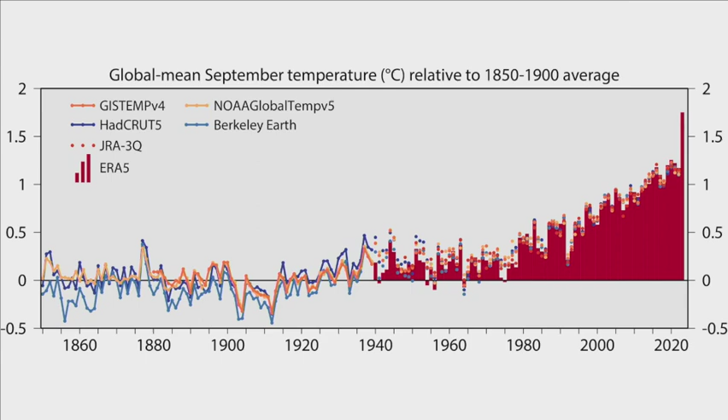That's pretty screwed, and we have to sort something out around this. So it's something that we have to do. We have to invest. Our industry, you've seen it before in various slides, is a pretty big carbon user. But I don't misunderstand the fact that there's no point just saving carbon, right? We've got to save other stuff as well. We've got our social outcomes, our strategic outcomes we need to meet, but at the same time we've got to save some money.

So we need a decarbonised, cheap, sports, leisure, community hub for the future. So here it is. The beauty is it'll be 80 degrees outside. We won't need a roof. We won't need air conditioning. We won't need any of Neil's stuff in there because we'll be achieving the same social outcomes, the same strategic outcomes. Why don't we have outcome-based commissioning? That will just sort a lot of this stuff out.

The other thing, it was interesting to see Nick and Liz play off each other around budgets this morning. Nick, 250 million. Liz, within local government, spend about 900 million, about £1 billion. We at S&P do about 200 million a year. But it's not really a competition, because there's one winner in the room, and that's the NHS obesity budget, which is 6.5 billion per annum.

6.5 billion per annum. I was sat kind of there-ish about 3 weeks ago at the NHS Estates Conference. And do you know, over 2 days, how many times they mentioned our sector? Zero. Never. Not once did we come into the NHS mindset around achieving the social outcomes that the guys have been talking about.

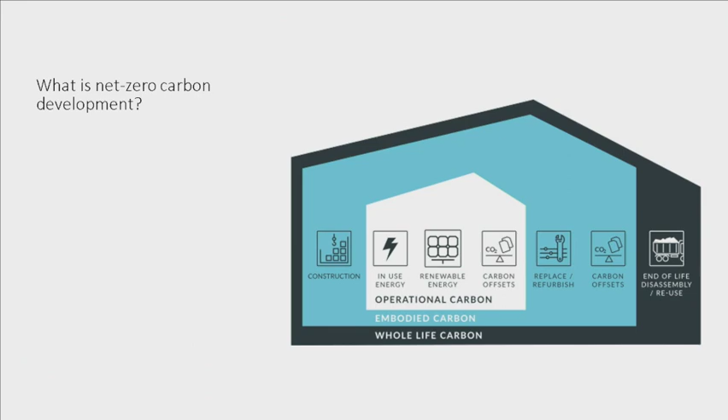To explain what carbon is, there are three sorts of carbon. The middle one is operational carbon, that's kind of obvious, it's in the in-use energy, renewable energy, carbon offset - we should take that off, by the way, but carbon offsetting. So that's operational. Then there's embodied carbon, that's when we build something in the first place, or repair something, or buy some new piece of kit. And then there's whole life carbon, which is effectively what happens when you get rid of it, when you demolish it, when you renew it, when you do something new. So you have to measure all of these, and you can measure all of them. There are ways - if we're designing a building for you, we can tell you to the gram how much carbon we're putting into that building and how much it should use.

Obviously, the embodied carbon in the construction over the period of 60 years kind of stays the same. Embodied carbon in use goes up because you repair a pump or whatever, you renew something, then there's operational carbon. So that's the whole of the carbon cycle.

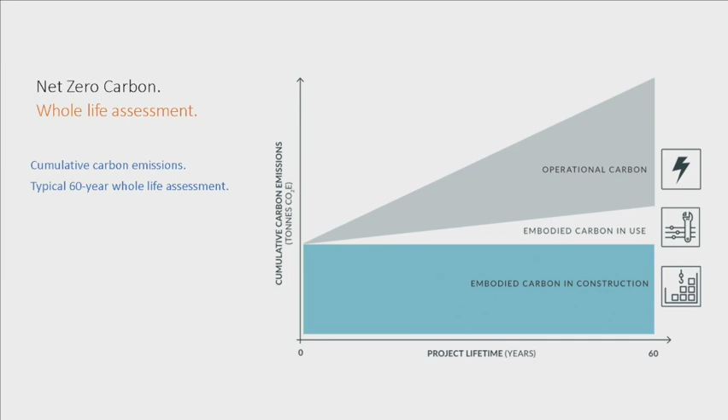And actually, I'm going to skip that because time's a bit tight.

There is an easy way to get rid of carbon. A really easy way, the simplest way, and you would never do this, right? But if you replaced a gas boiler with an electric boiler, you've done it, you're sorted. And then you buy your electricity from a decarbonised grid, you're carbon-free. But it will cost you a lot of cash to do that. Not the capital to buy the thing, but operationally it would cost a lot. To heat that much water in a swimming pool costs about 7 times more with electricity than it does with gas. Think of it that way.

Okay, so you've got to be way more efficient. And some of the stuff that Leisure Energy talked about this morning was around how you make that more efficient. And that's a great system, by the way, for when you're looking at existing stock and how do you decarbonise existing stock. And we do a lot of that with the guys.

But this story is just about a new build, because in Exeter it was a 50-year-old terrible building that we replaced. And there were all sorts of other reasons, strategic reasons, policy reasons, why we did what we did, why they wanted a new one.

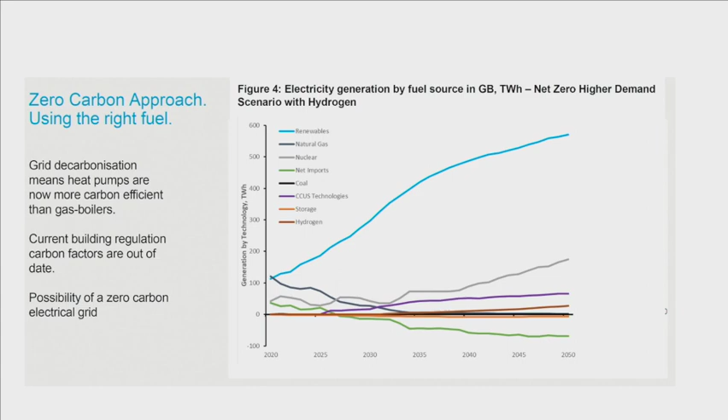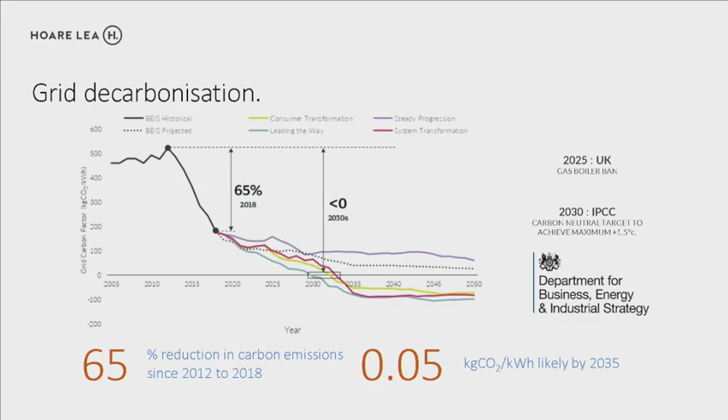And that's going to happen around about 2035-ish, okay? So our mission really is to make sure that we're buying off a decarbonised grid when we are, or generating our own power, solar panels, windmills, that sort of stuff. Because it's all very good saving all the carbon, but if you're paying an awful lot of money for your electricity, and remember, electricity prices will eventually vary, if you're paying through the nose on your meter, it's not going to work.

So the thinking is, the really simple thinking, is you've reduced the amount of energy it's taking in the first place, the building is actually using. So it's one thing to change all the kit that's providing the energy or converting the energy into heat or light. But the idea of Passive House is that you think about it, it's to reduce the actual load, to drive that right down. So that's the theory behind it, because if you drive that right down, that will drive the cost down.

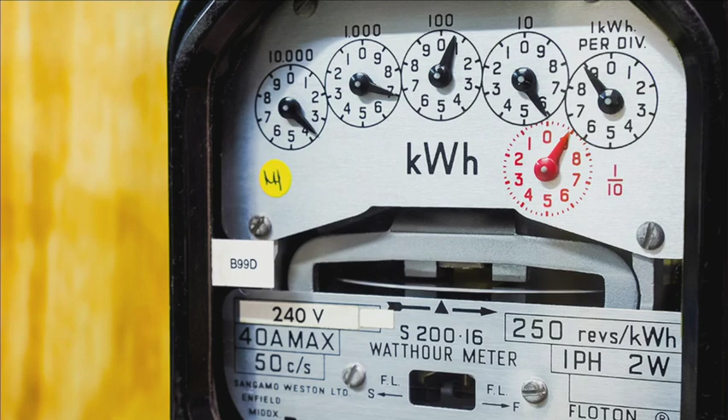But the kind of problem that Exeter had, and like every local authority's got this, if they're thinking of doing new stock or even changing existing stock, is along with all the stuff that the guys have spoken about today around other policy decisions, this is actually quite a difficult thing to do. The expertise in the room around the table is pretty light.

When we did this with Exeter, it had never been done before. For clarity, there's 2 buildings in Germany which are very simple kind of insulated boxes with swimming pools in, and that is all that's ever been done. Exeter wanted us to do something that had never been done before, ever in the history, like literally on the planet. It had never been done.

Everyone thought you're mad at some point, and one of their challenges was, what does it mean? How do you get a badge? What's the certification process? What does good look like? Is it that route, that route, that route, that route?

And there's lots. You will have heard of BREEAM and the Passive House you've heard of. There's a Well Building Institute. There's a Fitwel. There's American versions. There's European versions. There's Asian versions of all this sort of stuff.

And actually, to choose which one of these that best fitted the Sustainable Development Goals was impossible, because none of them do. None of them do. So if you take something like biodiversity, which comes out of the Sustainable Development Goals, biodiversity is not in any of these. If you look at social value, it's not in any of these. If you look at transport, it's not in any of these. So there's no one system that anyone can go, I want one of those. I want a Keith Ashton certificate because he thinks about everything. That doesn't exist.

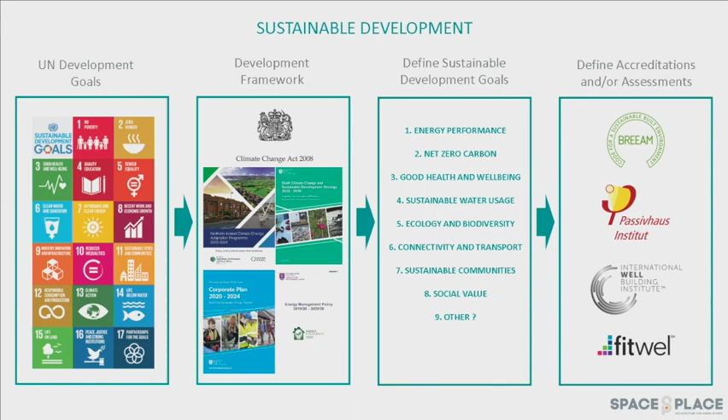So what we did, and it's really basic stuff if you like, is we compared the certificates and badges you could get, and what the CO2 savings were, what the CapEx (capital expenditure) uplift was, and what that meant for renewables on site.

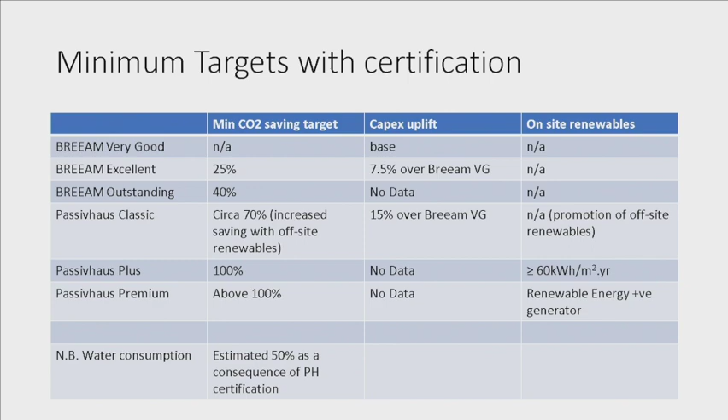There's various options, even in Passive House, there's a Classic, a Plus, a Premium. You can do different things. The Passive House Premium, by the way, might as well be a power station because it's generating so much energy on its own.

So they had to pick one, and we picked one, and we went through it with them, and we got involved with the Passive House Institute. There's a bit of a clue in the title - Passive House is a German certification system. It's mainly if you're doing houses.

So when we turned up to the PHI in Germany and said we want to do the world's first multi-zonal, huge leisure centre passive house, they went, well, that's interesting, because there's no certificate for that, because the way Passive House works is that all the KPIs are already set.

So, because of a house, they know what the KPI of a kitchen should be, or of a house, or of a bedroom. Those sort of data points are already in existence.

We were inventing something new, and it's one of the reasons why it's actually taken quite a long time to sort this out, because it's a bespoke model.

And the theory going forward - there are a number of these in development, we're working on a couple - the theory now of Passive House is to improve on the last one, which comes back to my point: it should be an ordinary project. It's not an ordinary project, but it should be.

So Exeter looked at these three things with the building. They said our triple bottom line, if you like, was the climate, the biodiversity, and the well-being of people. And that could be easily transferred into kind of people, profit, and planet around what we did, why we did it. So we set ourselves KPIs within it.

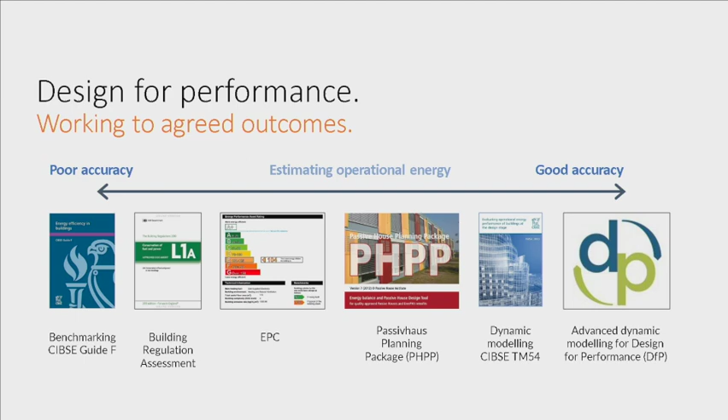Even Passive House's planning package was great if you were building a house, rubbish if you're trying to build a leisure centre. Dynamic modelling gets a bit better, and advanced dynamic modelling starts to get really exciting. We had to get into some of this to work out what our target was.

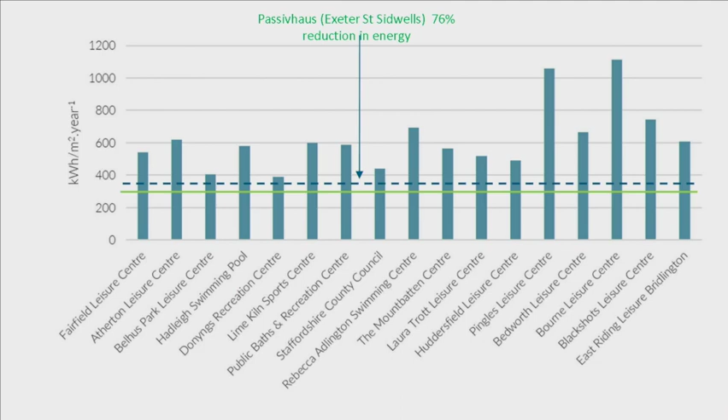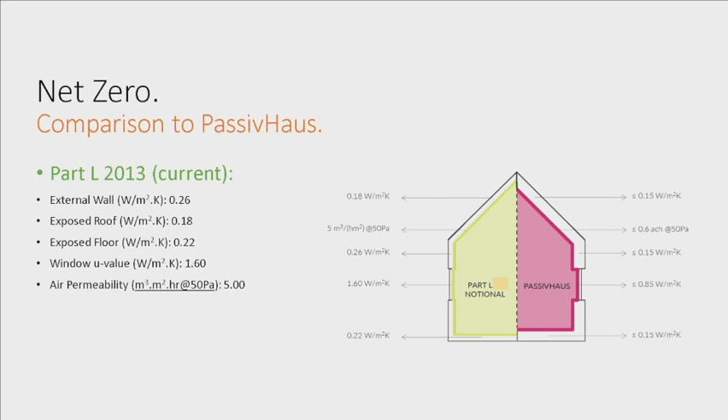So we took a whole bunch of typical leisure centres, like Becky Adlington Swimming Centre, which was using about 700 kilowatt hours per metre square per year. We set ourselves a pretty modest target against those averages. The target was set by the PHI, the Passive House Institute. It was modest, but quite difficult to achieve because it was significantly different from Part L building control, or BREEAM, or anything like that.

So what's Passive House? What is it, and how would you best explain it? Think of it like a thermos flask. If you pour something hot in the top, it's going to stay hot. If you pour something cold in, it's going to stay cold. That's Exeter, 42 million quid's worth of Exeter, St Sidwell's Point. That's how it works.

However, they wanted it slightly more complicated than that, so you'll hear the phrase multi-zonal passive house. Each part of the Exeter building is its own zone - this might be the gym, because it's got cold in, this might be the spa, because it's really hot, and there's all sorts of other spaces in between. So there's multiple little flasks inside our big flask.

We then suck and blow water, air, and energy generally in and out of all these little thermos flasks. We take them through a curly-whirly straw, and then we wrap all the curly-whirly straws together and exchange heat between one and the other. Not complicated at all.

So those clever in the room can work out that there's actually one of the pools here - there are 3 pools. That's one of the pools, and this is the air handling ductwork for the pool and the changing room. It's unbelievably complicated, massively complicated, but massively impressive in what it's actually doing. It's actually loads of AIs working out what to do where and what to move around.

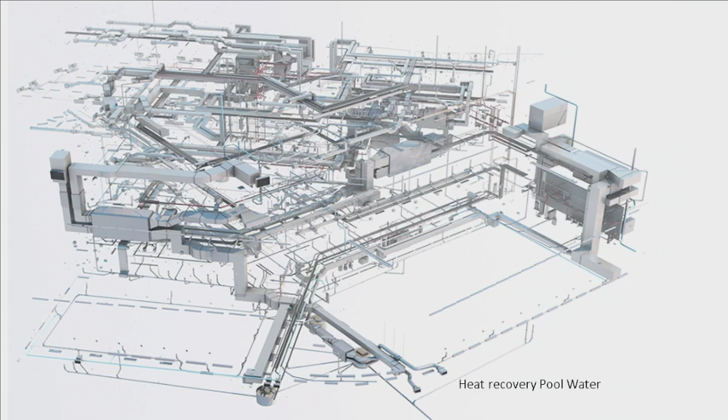There are a couple of gas boilers in St Sidwell's Point. They've never fired up, never turned themselves on. The AI was learning the process, and the first month of it was a nightmare - the water was running at about 36 degrees, you could boil a chicken in there honestly, which is clearly too hot to swim in. It had to settle down. The system had to work out where to put the heat so it could effectively deliver the right heat in the right place at the right time.

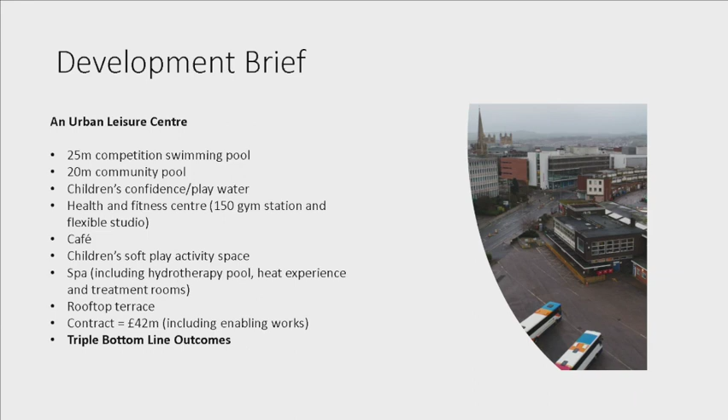Just on time. Do you want to do Q&A or do you want to do... What do you want to do? That's the question, isn't it? Or do you want me to... Q&A at the end. What do you want? What I'll do is I'll just move around a bit.

If you go there, and that's the sports centre there, and at the same time we did a bus station. They wanted a passive house bus station, by the way. We thought it was completely nuts because the whole point of a bus station, the doors were opening all the time, so that was never going to work.

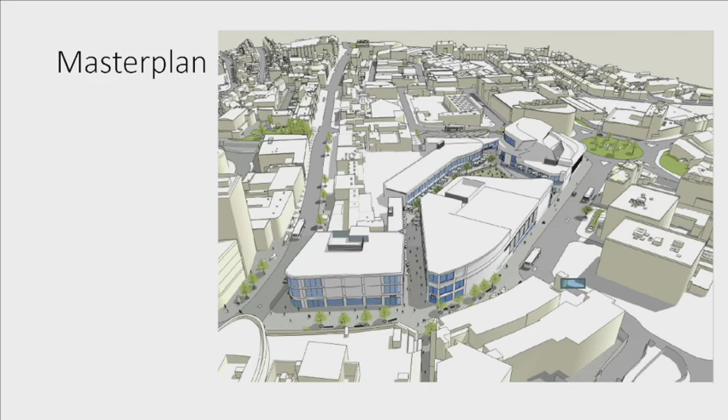But this bit here was to be a redeveloped site. It was the Crown Estate, actually. The Queen was going to build a retail park with us as we built the leisure centre, which is why when you look at the leisure centre on plan, you think, what happened to this bit here? There's a bit missing. Because that was meant to be a retail centre which never got built.

Inside, I'll show you a couple of pictures. If you go there, it's weird, all right? It's weird because it feels like no other sports centre you've ever been in. Genuinely, the water, in the morning, you can go into the swimming pool, dip your cup into the swimming pool, and drink the water. The water is better quality than what's coming out of the tap because of the filtration system and what we're doing to the water.

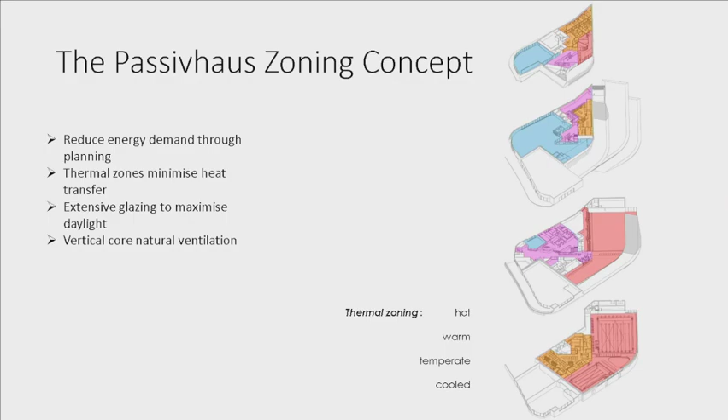The air quality, someone said before, open the window. The window's actually open. We can get fresh air in. There is more fresh air in that building because we recover the heat of the old air as we push it out. It means we can get loads more fresh air in. You kind of zone it, those zones are effectively like our flasks that we showed you before. You end up with a very complicated building, so you try and reduce volumes, that's why it's steps, and we want loads of natural light as well, so that's another reason why it's steps.

That was a model, this is the real life thing. Anyone notice something weird about this? Neil Bland's not allowed to answer. Come on. No solar panels? Yes, no solar panels. Zero solar panels. The reason is, like every local authority, they had a limit on their capital expenditure. The other thing is, we had no idea how many solar panels we were going to need. We'd modelled it to death, but we had no idea. And actually, a year and a half in, it hasn't worked. It's been way too hot in there.

The reason it's too hot in there, it was designed, and it was on Lizzie's slide, for 500,000 users in the first year, people like me with my heat in the building. It's got 14,000 members. It wasn't planned to have 14,000 members. The trouble is that Exeter, unintended consequences, priced it exactly the same as all their other leisure stock, and they did a shared membership scheme across all the centres, including the 40, 50-year-old ones. So it's a bloody nightmare. Of course, everyone came to this one, and that's why the pool started heating up to 35 degrees. So it's ready to take solar panels, but we are waiting to know exactly how many it needs, so we don't do any more or less.

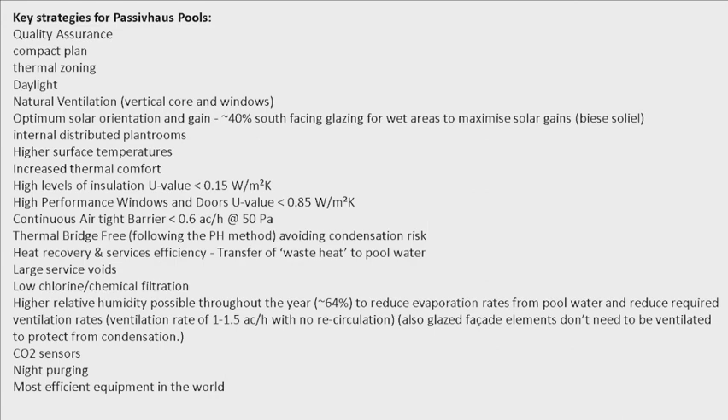I won't do that one. I have slightly less time. I'm using less carbon, thankfully, because I had about 12 minutes less than I thought.

Exeter, I guess the story with Exeter is that they committed. They absolutely committed. That first bullet point, we need a strong, consistent political leadership, happened pretty well from day one, and that's quite unusual. We're going to share these slides so you can read the other ones, but that was the most important thing.

Now, everyone wants to know the big question, what's the payback? It was designed, on the energy pricing at the time, for around a 10-year payback. The reality is we think it's going to be less, about 6 years. But it's not ready yet. We are still getting the data out of it. I'll give you an example. The amazing filtration system, it doesn't work properly.

I mean, the computers are still working out how to do it. To save energy, it's south-facing, so any lifeguards in the room, close your ears, south-facing pools, because that's the best way to get heat into the pool. But of course, that's causing effectively algae growth. You don't get algae growth, but effectively algae growth, which you have to deal with.

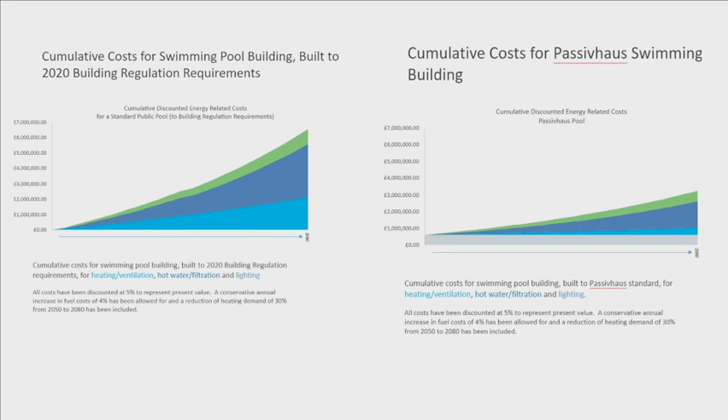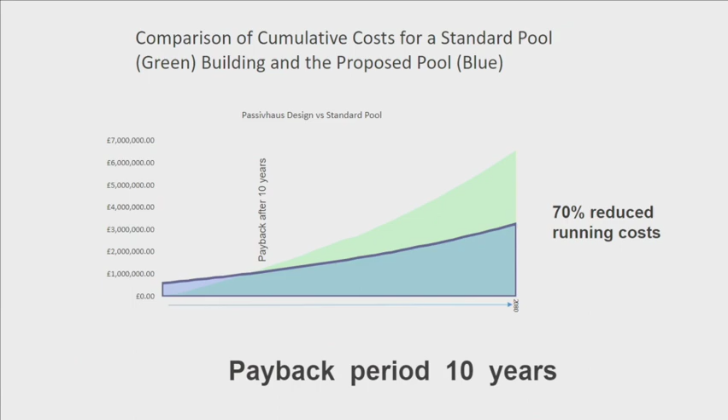So there's a whole bunch of things that we're still learning on. So we're pretty well sure we'll save about 50% water, and we'll save about 70% in energy, but we'll save 100% in carbon, 100%.

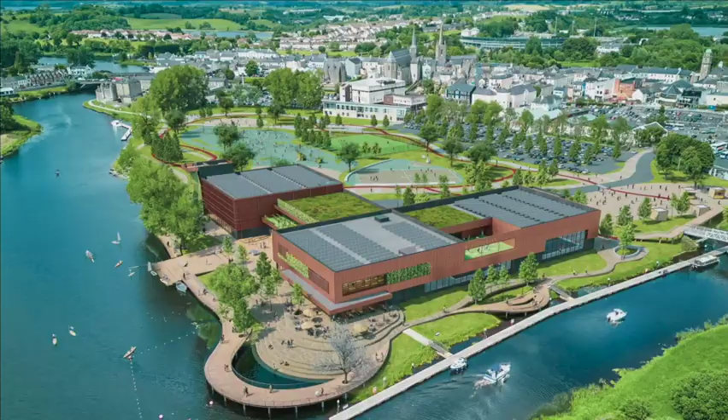And I think it's up to us as an industry to actually work hard with people like Sport England. Let's get Sport England to fund some data collection around these buildings. We're doing more of them. This is one in Enniskillen. This is an interesting one.

1 minute. Have we got 1 minute? Yeah, keep going. No one's walked out yet. We're doing all right.